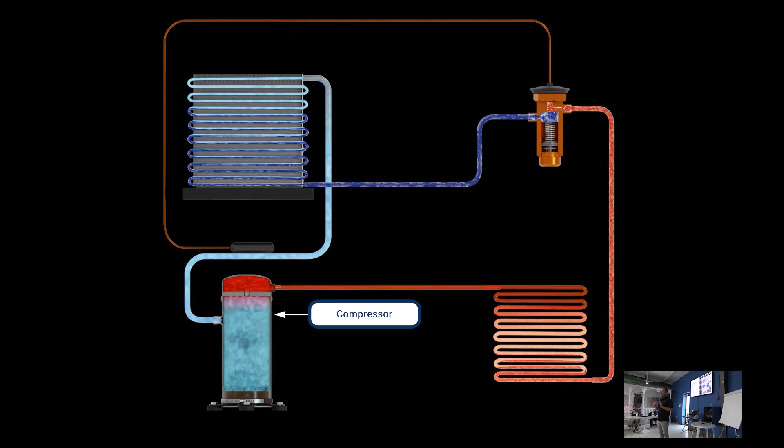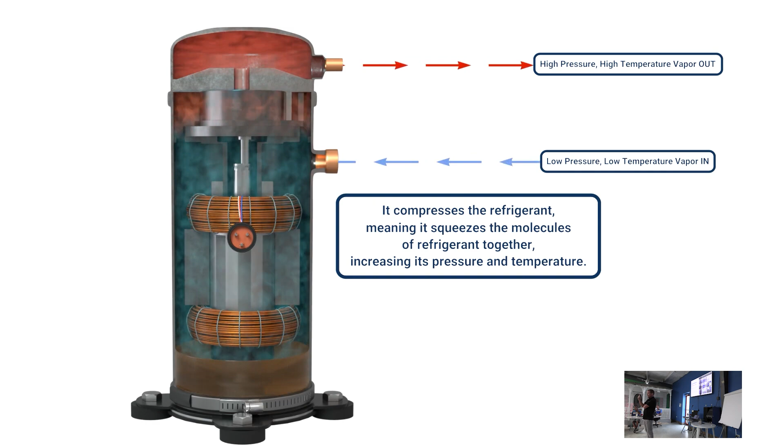Most guys don't know this. Refrigerant gas goes in down the suction line, and it just drops into the compressor. It doesn't go right into a compression chamber. It just drops into the shell because it's a refrigerant-cooled compressor. It's cooled with refrigerant vapor, right? So you have the windings, everything is all immersed in there, and you have your terminals. Those terminals are metal, and they go through glass, fusite.

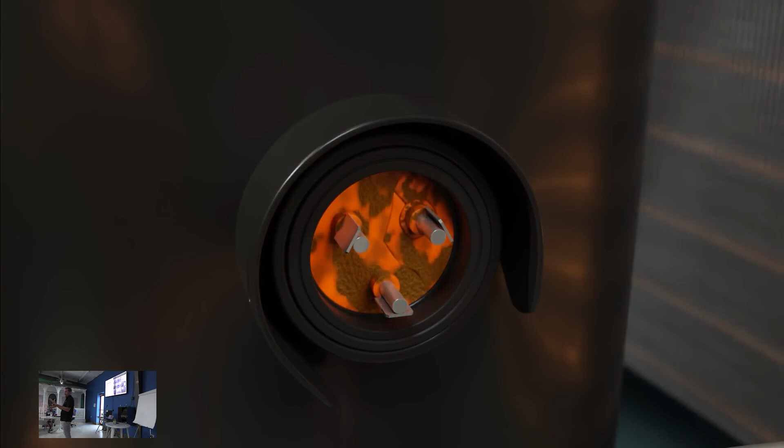You guys have all seen compressor terminal venting before, right? Where a terminal blows out of a compressor. That actually is all on the low side of the system, and that is the weakest part. And that's why you got to be really careful when you're taking plugs on and off of compressors. You see a lot of guys do a lot of this on them, and overpressure, all that. So when you're pressurizing a system, you need to look at the inside and outside system and look at the maximum pressurization and never exceed that.

Okay, and a lot of times the max pressure of the condenser is actually a lower max pressure than the fan coil, air handler, whatever. Because a coil, it's just metal. There's not a whole lot going on. Like you said, you could have the tube on the expansion valve or the expansion valve itself or whatever. But the actual weakest point, most likely to fail, are those compressor terminals. So when you pressurize a system, you pick a number that's below that. For us, typically speaking, we're also picking a number that's below the external equalization shutoff of the expansion valve.

Okay, we're going to talk more about this later, but I want to tell you something you've probably all seen before. When you're pressurizing a system with nitrogen, where do you put the pressure? How do you add pressure to a system when you're nitro pressurizing it? What's that? So yes, where? You use a regulator on a nitrogen tank, you hook it up. Where do you put it in at? Liquid line. Somebody said that. Somebody said suction line. Liquid line from both ends.

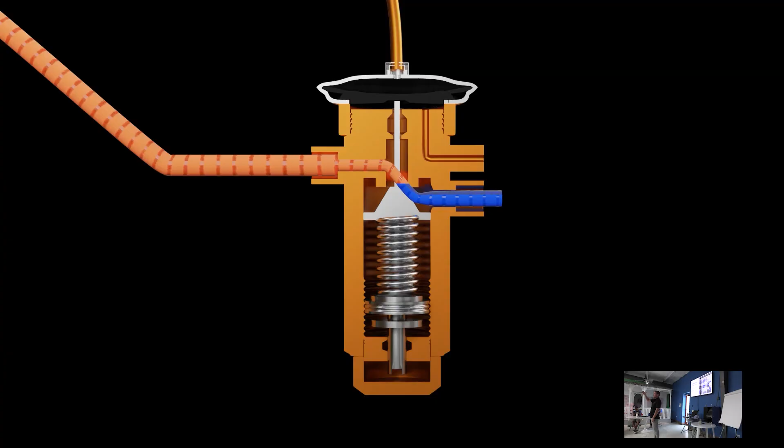And that is the closing force of the valve, meaning the pressure on that external equalizer is what closes the valve. Once the pressure gets to a certain point, it is completely shut, and now it doesn't allow any more refrigerant to come through. That's when you hear that term hard shutoff, or non-bleed valve, non-bleed TXV, or hard shutoff TXV. That's what they're talking about.

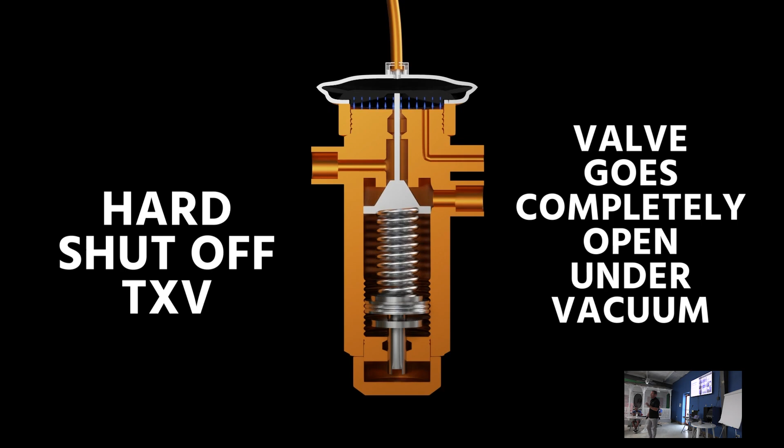So typically, when we're doing it, and again, this is for a typical system, we're only going up to just below that point where that occurs. So 120, 130 PSI, something like that, and then we're letting it sit for an hour or so. But we also did a visual inspection on everything, and we did a bubble test inspection, and we're measuring it with digital devices to show any sort of drop we're going to be concerned about as long as there's not a temperature change, right?

Now, when you get to big, complicated systems, VRF systems, VRV systems, refrigeration systems, long line sets with lots of connections, then that's when you do higher pressure and you let it sit longer, okay? A lot of people would call it heresy, what I'm even telling you right now about how we do it, but it's the truth. It's what we do. Even if we go to 120 PSI, something like that, we're ending there. If you guys do higher than that, great. If you do longer than that, excellent, right? That's awesome. But we do that just so that way, once we set it, we know it's set.

When you go in from both sides, you can do that. But the downside is they may be slightly different from each other, right? And then that can potentially confuse you. You go back and you miss it. Is that a big deal? Not necessarily, but if you do exceed the pressure, now again, you have higher pressure on one side than the other, that's a non-bleed valve, but it could bleed a little bit, right? And then that gives you the false sense that you have a leak when you don't have one. So that's why we stay below that point where it actually traps it.

Not really doing the best job of explaining this, but all that is to say, set it at a fixed pressure, put it into, if you have digital gauge set or Fieldpiece probes or whatever you have, put it into that delta P, which means change. Delta just means difference. Delta P, difference in pressure. Put it in that difference of pressure mode and just watch to see if it drops over the period of time. And like you said, temperature compensating is really good if you're going to be there for any amount of time. Like if you're going to be holding it for a while, that's a really good thing.

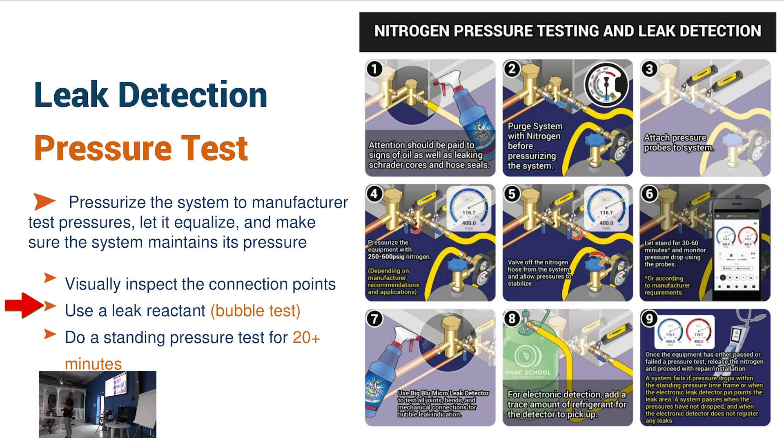Bubble test every joint, look for that foam, and then when you get to vacuum, now you're also making sure that you hold a decay test. So it's that multi-pronged approach. Visual, pressure test, bubble test, vacuum decay test. Tells you whether or not you have leaks or not.

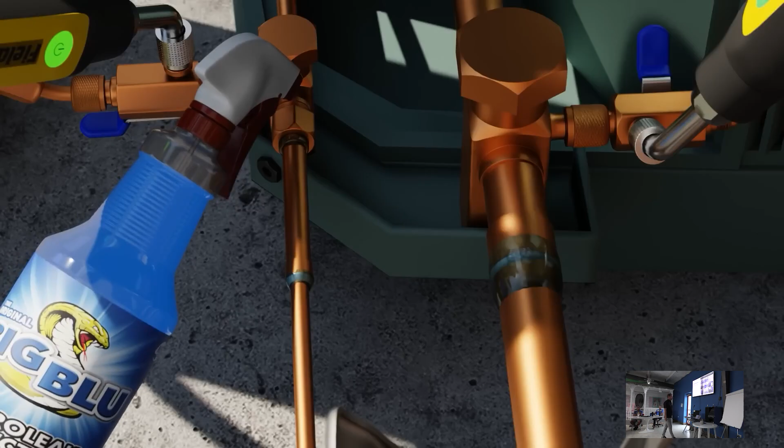If you get into cases where you're really chasing a hard to find leak, that's where some people will say, use a leak detector, put some refrigerant in it, all that kind of stuff. I almost never find that we need to do that when we're doing installs, because right now we're still talking more about installation practices. That's really not that effective, honestly. In service, obviously, the electronic leak detector and bubbles are the way to go. That's obviously what we're using in most cases.

One thing, never release the pressure before putting vacuum. Never release the pressure? Release the pressure off. Before you put the vacuum on, yes. I have certainly created, yeah, the volcano of oil that comes out of the top of your vacuum pump is not very pleasant.

What are your views on dye? Like, for example, different methods? I don't like dye because I don't like it getting all over my tools. So it's very messy. But there are cases where UV dye makes sense. Again, we use it. We've used it in some cases in big refrigeration systems where you're going to come back often. And you're going to be there a lot.

They use it a lot in cars because in cars, there's so much there. There's so much in the way that just the ability to kind of see it sometimes is helpful. But then the problem is, once you do find the leak and fix it, now you got to get all that cleaned off now too. Otherwise, it's going to be a false positive.

So I don't love it. A lot of people will say, well, you don't put that in there. You only put oil and refrigerant. The compressor manufacturers don't like it. And of course, it's true. They don't like it. The main reason they don't like it is when they get warranties back and they have to cut it open on their bench and it gets all over them and it makes a giant mess and pisses them off. So they say, I don't want this anymore, right?

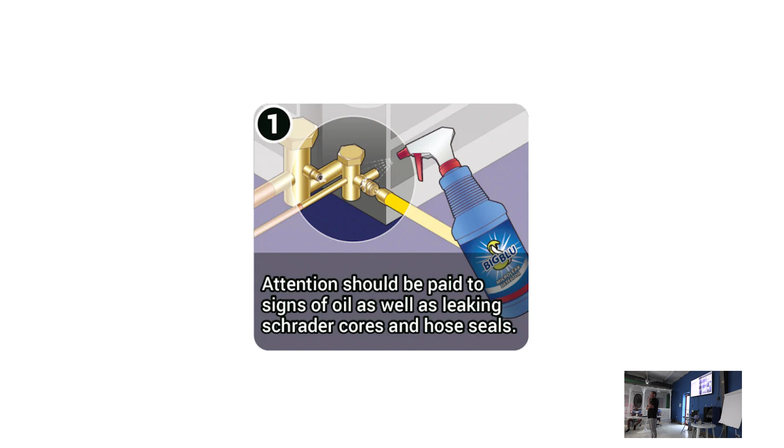It's the recharge. It's like, no, come on. Was it really the cap? Was it really the Schrader? Or are you just using that as an excuse to get out of the job? And you know how often that is the case, where they'll use something dumb and it's not that dumb thing. And so just going up before you even pull those caps off, just quick dab it and see, do I actually have bubbles or not? Because if you don't, and you've done it right, then don't focus there, right? Focus elsewhere.

But to your point, yes, it isn't always just the connections that you've made. We're even running into cases now where you have line sets that are reacting with the copper, and you're actually getting corrosion within the line set on some of the ductless systems, especially with the white foam tube insulation. Have you guys run into this at all? I mean, we have, and there are certain types of Chinese line sets that are actually corroding in the line set itself. And so you always have to be open to new things that are causing it.

One real common one that we'll run into is water softening equipment, where they use salt as the regenerator, and the salt discharge goes onto the copper line set or drains near it, and then that causes corrosion. Or sometimes it's the condensate drain dripping on the copper, and the client likes to use bleach in their condensate drain. Just use your senses first before you start going crazy with tools. Tools are important, but use your senses first.

Use common sense. Where are the most likely places for this to leak? Eliminate those before you move on. And that goes down to just don't always pull the caps off. If you see oil around those caps, don't just pull them off. You want to confirm whether it's leaking before you even pull them off. Because once you pull them off, if you put bubbles, you're going to get bubbles in the port, and it's a whole thing.

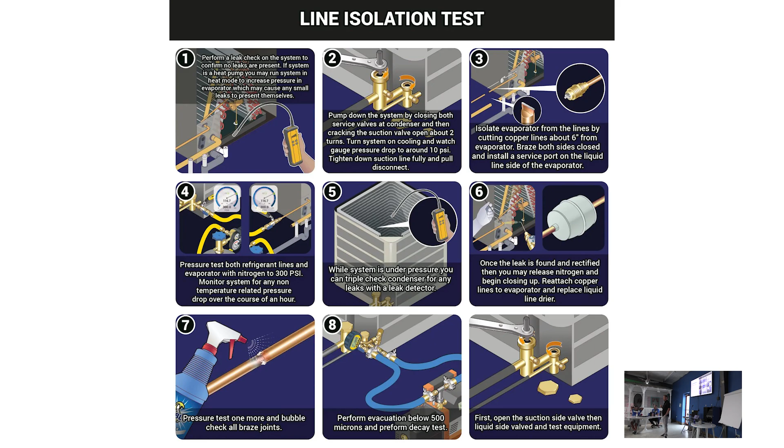To your point, though, to eliminate all possibility, line isolation test is the way to do it. It's just expensive, it's time consuming, who wants to pay for that? It's this trade-off that you have to do. Confirm, as much as possible. Wherever possible, confirm. But again, look at the brand. I don't know what brand soap bubbles you're using, but test that, right? If you're using a brand that's not Big Blu, that's okay, but just test it and see, are your leak detectors going to react to that?

And that's the thing I always say. Number one thing with leak detectors and vacuum pumps is you have to maintain them. You have to test them regularly. You can't just expect that they're going to keep working. In fact, all heated diode leak detectors, that heated diode has to be replaced periodically. And if that thing's 5 years old, it's probably barely working anymore. So you have to keep up on that and know your tool really well, know how to maintain it. Calibrate it too, of course. You use an electronic leak detector to search for a leak, and you pressurize the system with nitrogen.

No. No. Nitrogen, and again, remember, the air around us is mostly nitrogen. So how would that work, right? A leak detector would be going off like crazy because the air is mostly nitrogen around us. There is a way you can do leak detection on a system with only nitrogen, but that's an ultrasonic leak detector. Ultrasonic listens for the leak.

And for those of you who are a little gun shy about old school leak detectors, you really don't like them, I would encourage you to try ultrasonic. It's like a Ford Chevy conversation. Oh, that was a bad example, a DeWalt Milwaukee situation. Some people like DeWalt, some people like Milwaukee. I don't like ultrasonic. I could never get used to it.

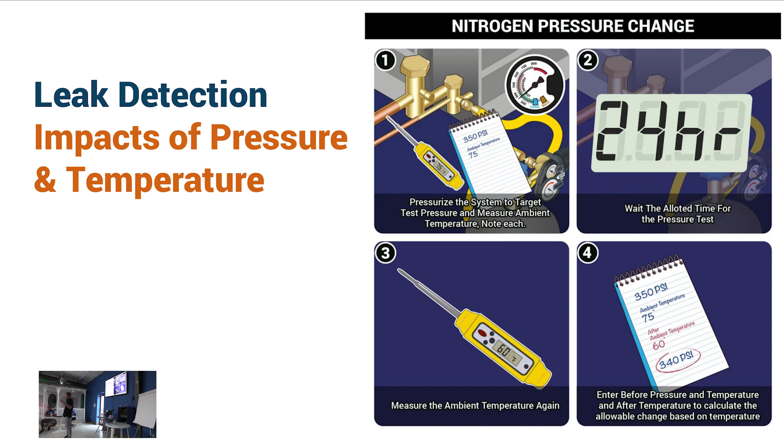If it's really critical, a multi-zone ductless, for example, you got multiple heads running all through, and you don't want to leave before you know, then let it sit overnight. Let it sit a couple days. If you're doing a VRF, VRV system, a couple days at 600 PSI they'll do. Grocery stores will do them for really long periods of time because the more the internal volume, the longer it takes for it to show up on a gauge when there is a leak. The smaller it is, the quicker it shows up. That make sense? Smaller, quicker?

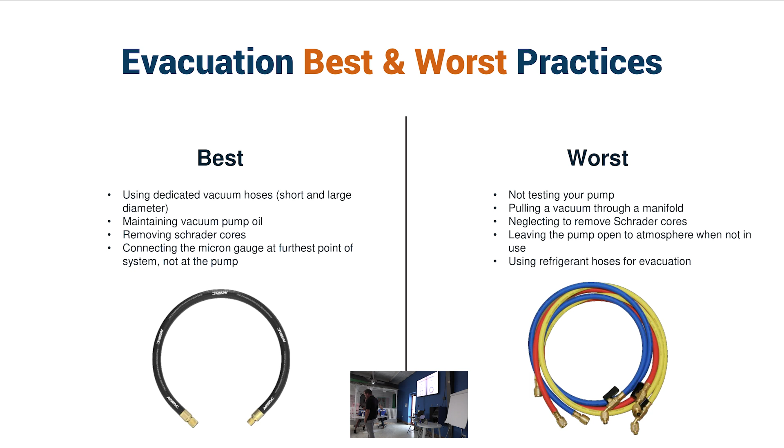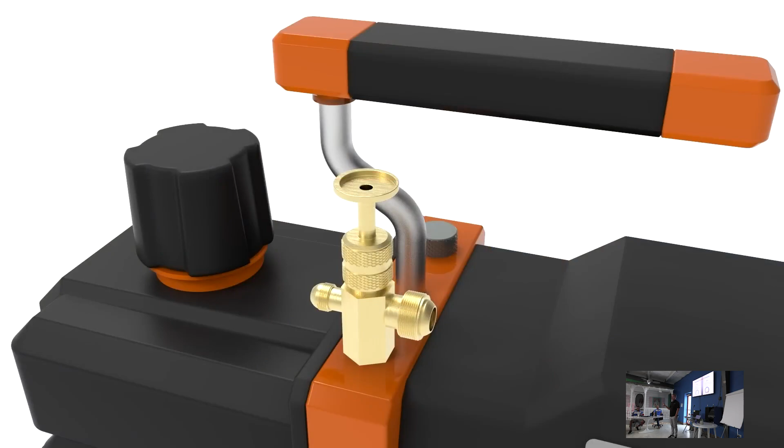Okay, we'll do some quick evacuation stuff. I want to specifically address, and I'm not going to have much in the way of slides for this. A lot of you have probably seen my video on evacuation. That's a big one that's come up. But I just want to start with the basic science of evacuation. So, why do we measure vacuum in microns versus PSI? Very small pressure measurement. It's a very small pressure measurement.

Well, what is the goal? The goal is to get almost all of the stuff out of inside the system, right? Can you do that? That's the question. We're going to talk about that in a second. In order to know that we get almost all the stuff, we have to measure it down to a very small amount. Now, people who say, why do I have to use microns? I use the example and say, okay, I want you to measure off 5 feet for me. So you'd be like, hand me a tape measure, right?

I'd be like, no, here's the trick. You got to use the odometer on your car to measure off 5 feet. Could you do it? Well, an odometer measures distance, right? So why wouldn't that work? Well, because it doesn't measure a small enough distance. And that's actually all a micron is.

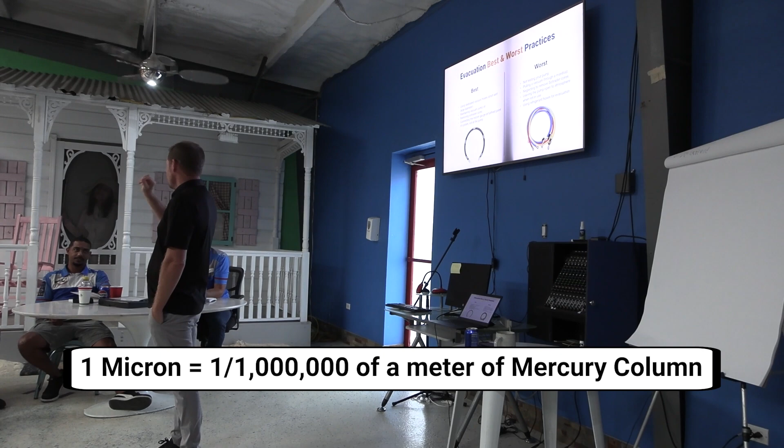A micron is actually a measurement of distance. It's actually a millionth of a meter of mercury column. That's what it is. It's the pressure that it takes to move a mercury column 1/millionth of a meter. Tiny measurement. So that's why we use a micron gauge. And that's why a micron gauge doesn't really work for anything else. It's only for one purpose.

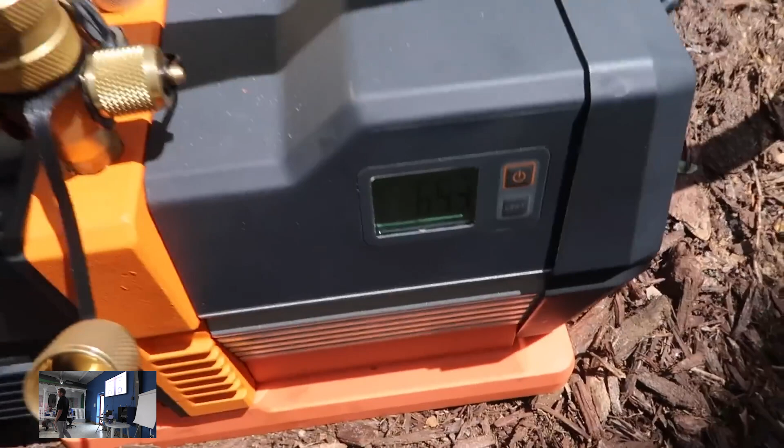The other thing that's interesting about a micron gauge, you'll notice that you never zero out a micron gauge. Anybody here ever used a micron gauge? Who here has ever used a micron gauge in their entire career? How many people presently use micron gauges? Okay, a little bit less. All right, fair enough. Good, so you at least use them.

You don't zero them. Have you ever noticed that? Because a micron gauge is in reference to no pressure whatsoever. That's what it's in reference to. So it doesn't matter. Zeroing is all about differentials in pressure, zeroing to atmospheric pressure. With a micron gauge, you're trying to get it to nothing. Which brings us to our next concept.

There is no such thing as negative pressure. I'm going to pause there. There is no such thing as negative pressure. There is only pressure that's less than the pressure that we're used to. Pressure is 14.7 psia at atmospheric pressure. Right now, we are at sea level, so that means we're right about 14.7. When we say something is a vacuum, all we mean is that it's less pressure than what we've got.

We're already sitting at the bottom of an ocean of air. There's an ocean of air all around us, and we're at the bottom of it. 14.7. If we go up higher in the ocean, would we say that that's negative pressure? No, we just say it's less pressure. And when you get to the surface, now there's no pressure. That's zero pressure, in terms of this dumb metaphor I'm giving you. What we're trying to do is get to nothing. No pressure. We're not getting to negative pressure.